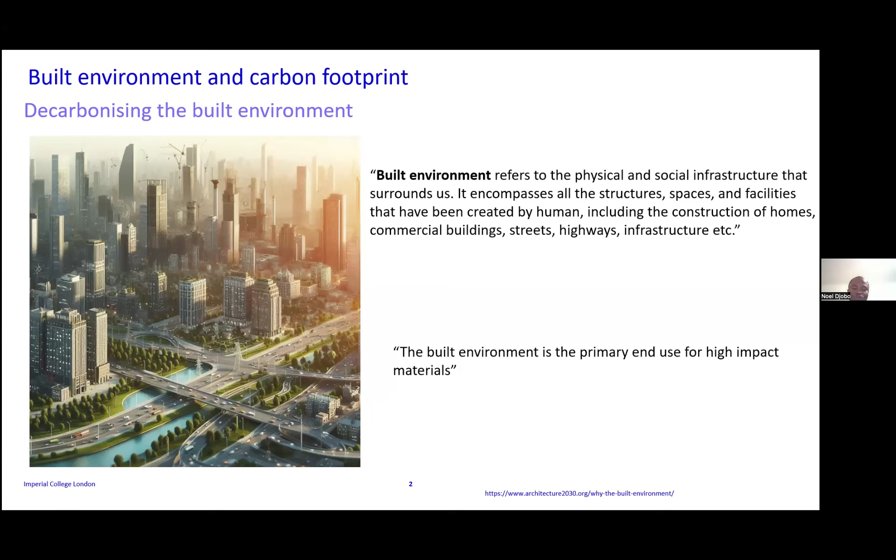But to be able to achieve this, the built environment is known as one of the primary end uses of high-impact material. So it consumes a lot of material. And the challenge with all this consumption of raw material is the carbon footprint of the built environment. It nowadays corresponds to about 42% of the annual global CO2 in the world. And this CO2 emission of the built environment can be split into two types: the operational carbon emission and the embodied carbon emission.

What we mean by operational carbon is anything related to functioning the building: the electricity that you need in your building, the energy needed for heating the building, and also the energy needed for cooling the building, specifically in Africa where the temperature is a bit high. So all these account for the operational carbon.

And the second type of emission is the embodied carbon, which is one of our main interests for this talk. The embodied carbon encompasses everything related to manufacturing the building material. This means extraction of the raw resources, processing the resources, and their transformation into the different types of construction material. We are all aware of the changes in the climate because of human activities.

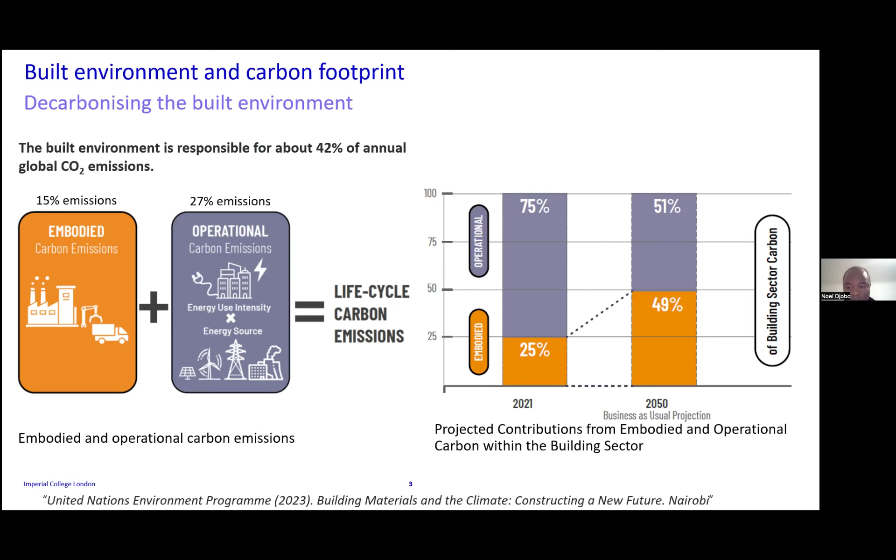Africa, the built environment in Africa has many challenges. Africa is the continent with the fastest urban population growth in the world. And by 2050, this will represent almost 3.17%. And this means that the population in Africa will triple by 2050. So we expect the population to increase by almost 1.3 billion people.

And the 10 fastest growing cities in the world by 2035 are expected to be in Africa. Because of that also, we need a lot of infrastructure to accommodate all those populations. And the point is that so far,

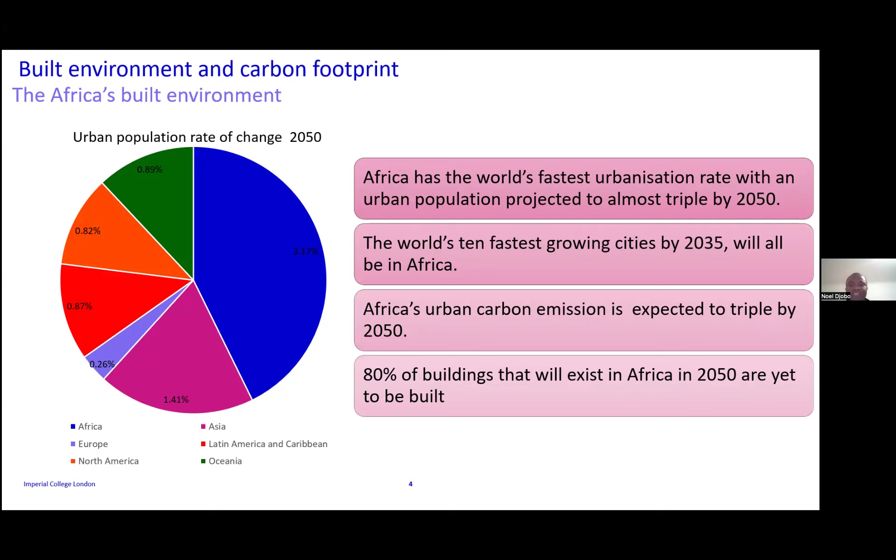the amount of building needed for Africa to accommodate that rapid growth of the population, the rapid urbanization by 2050, we have 80% of the buildings that Africa will need by 2050 yet to be built. So this means Africa will consume a lot of resources to be able to build infrastructure, houses, and everything for its population by 2050.

The point is that the population of Africa, as we can see in this graph, is almost scattered all over the different regions of the continent. And the resources that we need to build all the infrastructure by 2060 will mainly increase the amount of carbon emission that Africa is producing. But the point is that actually only 2% of the globally produced cement in the world is produced in sub-Saharan Africa. So Africa is as big as Europe and North America put together.

And in those countries, 80% of the population are already living in towns and cities. But in Africa, many people are still living in rural areas. But because of the development of the different African countries, we expect that population to rise very quickly, and we need to find a solution to accommodate them, as I was saying previously.

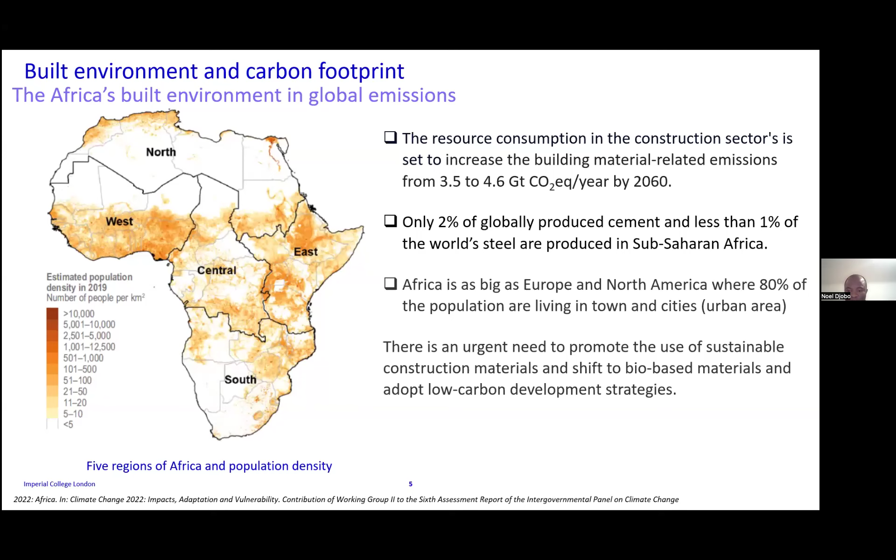What happened is, in Africa, the consumption of raw material and all the environmental issues related to the production of the raw material drew the attention of the scientists that we need to find solutions to be able to develop our continent without impacting our environment. And the three principles for enacting the decarbonization of the building material rely on these three words: avoid, shift, improve.

We mean by avoid, while we are developing our continent, we need to avoid extracting new resources. We need to rely on waste material, try to reuse them and deal with a circular economy system. But where the waste that can be turned into sustainable building material cannot be found, like in many African countries,

another principle relies on shift, which means if we are not able to use waste, if you are not able to deal with the circular economy, another alternative is to shift the type of raw material that you are using. We can rely on bio-based building materials like earth building material, timber, and bamboo.

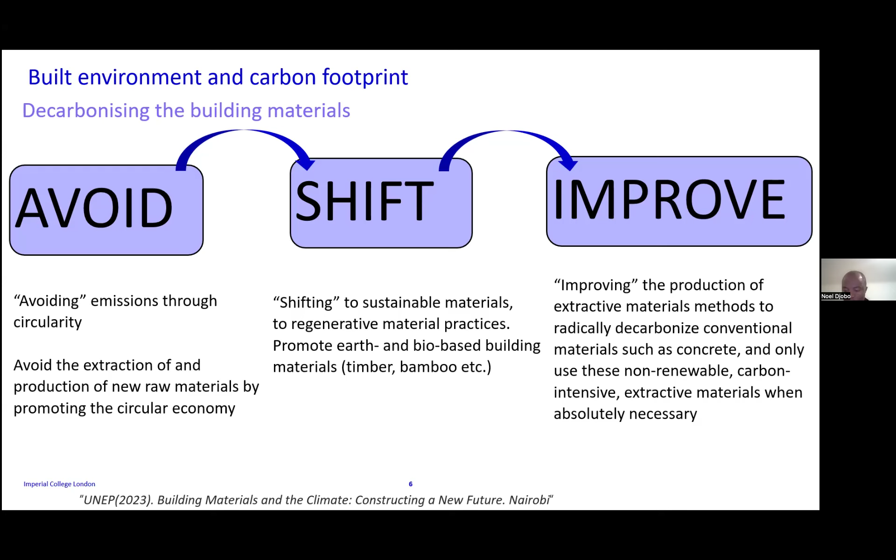And the improve principle means, since cement is a material that is used worldwide and it's a very useful material for building infrastructure, because of the embodied carbon of the material, we need to find a solution to overcome it. Let's delve into cement production and why we believe that it is a carbon-intensive material. Here is the process of how cement is produced.

Initially, for making cement, you need limestone and clay. And the limestone deposit and the clay deposit need to be very close so that the production can be efficient and beneficial for the company. When limestone and clay are extracted, they are crushed and milled to get fine powder. And that fine powder can now be calcined using a rotary kiln.

And here is where most of the issues related to the carbon emission of cement happen, because when you calcine clay and limestone, limestone contains carbon, CO2. So this will release a lot of CO2 into the atmosphere. And the point is that the energy used for calcining limestone is also problematic, because in general, people use fossil fuel energy.

And this clinker, when you calcine here, the product that you have is called clinker. Now you just mix clinker with gypsum, you have your cement. Here is the Portland cement bag that we can find in the market everywhere. And that product now needs to be transported to different places. This whole process

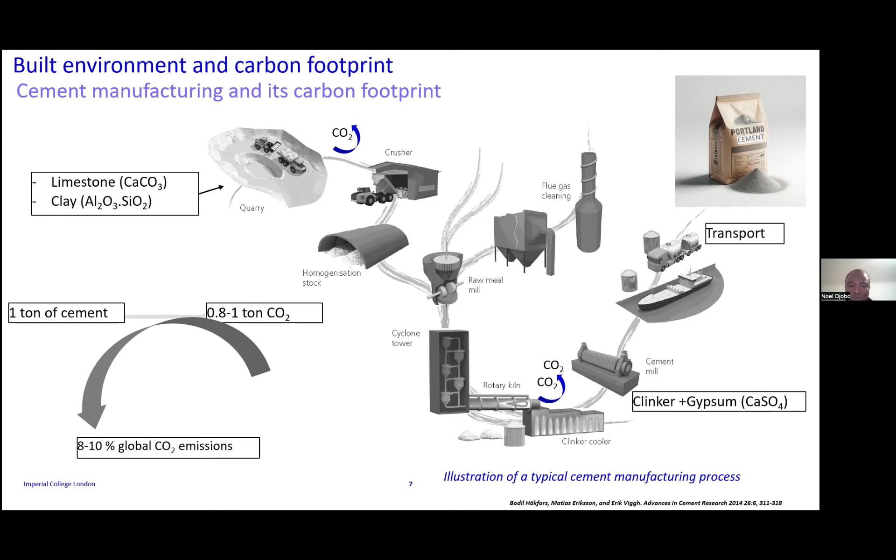So knowing the different impacts on climate change and the environment, the strategy adopted now to decarbonize cement worldwide, I mean, this is a strategy that is accepted by the whole community, by the whole cement industry, relies on 3 methods.

The first method is carbon capture and utilization, which means we come to the cement plant, we set up a device or a kind of machinery that captures the CO2 that is being released during the calcination, and that CO2 can now be stored in the ground like a geological storage or used for something else. A lot of technologies are being developed in that sense. But we all know that there is an issue with the cost and the price of implementing that technology, although they seem to be efficient for capturing.

The second principle relies on designing low carbon cement production technology, which means using alternative fuel for the calcination process, and also trying to harvest the heat released during the whole cement production process and to reinject that heat into the process. This also requires a lot of technology and a lot of money to be implemented, although they seem to be efficient at some point.

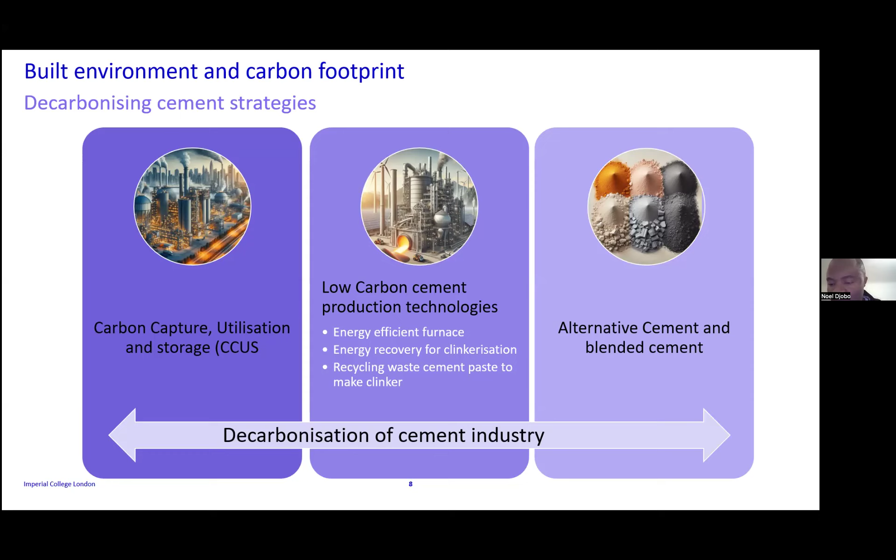Among the two types of alternative cement that I will be talking to you about this evening, we have first of all blended cement. This one is already being commercialized in the world and mainly in Africa. To make blended cement, you just take the Portland cement produced as I showed previously, and you mix it with what we call supplementary cementitious material, SCM. When you mix those two powders, you have your blended cement.

The supplementary cementitious materials being used include fly ash, slag, calcined clay, and volcanic ash. In Europe, Asia or America, they mainly use fly ash and slag. In Africa, you will see companies mainly use calcined clay and volcanic ash.

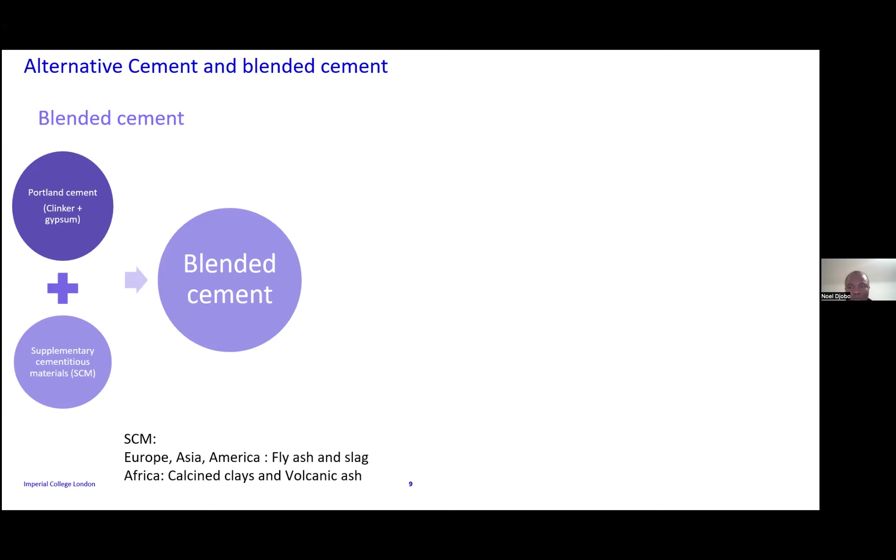This material can also be used to develop a new type of alternative cement that is called geopolymer. Here, the principle is quite simple. You can use the same supplementary cementitious material already being used for making blended cement to develop the geopolymer cement. And the second ingredient that you need is only an alkaline activator, which is in general sodium silicate. There are many of them, but this is the most used one and the most accessible one.

I just have to mention that this sodium silicate is a commercial product that is actually used in the cosmetic industry to make soap, detergent, and many other chemicals. So it is already well commercialized, and within the African continent, this is a product that's well known by many industries, and it's being produced on the continent. So to make geopolymer cement, it's so simple.

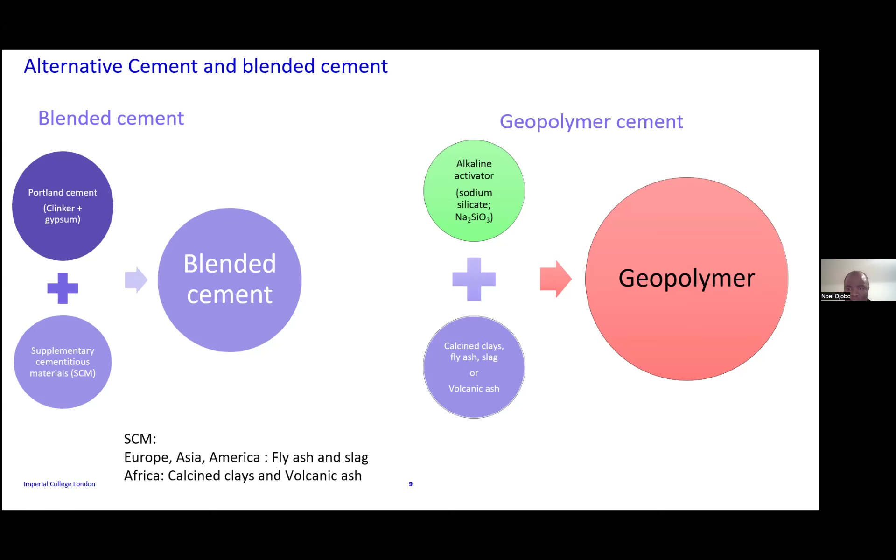You have your alkaline solution, and you mix it with a raw material, which can be calcined clay, fly ash, or volcanic ash, to make your cement. So now, what do I mean by fly ash? Fly ash is a hazardous byproduct generated by burning pulverized coal in power plants. So in some countries where they produce electricity based on coal, they have this kind of waste material being generated. And in Africa, very few countries are producing this type of ash.

And the second thing is that although this material is being produced in large amounts around the world, the point is that the transition happening in the energy sector means that many countries are now going toward solar energy, wind turbine energy or geothermal energy. So this type of product is being less produced.

The second SCM is GGBFS, which is ground granulated blast furnace slag. This material is produced while you are making iron and steel. So during the process of making iron and steel, you have this waste material. But the point is that, as with fly ash, this material is not very popular on the continent, because very few countries, maybe Egypt and South Africa, are producing this type of waste material.

But also in the steel production process, all the effort being put there to transition from high carbon emission steel to low carbon emission steel will lead to the scarcity of this material. So we need to find an alternative.

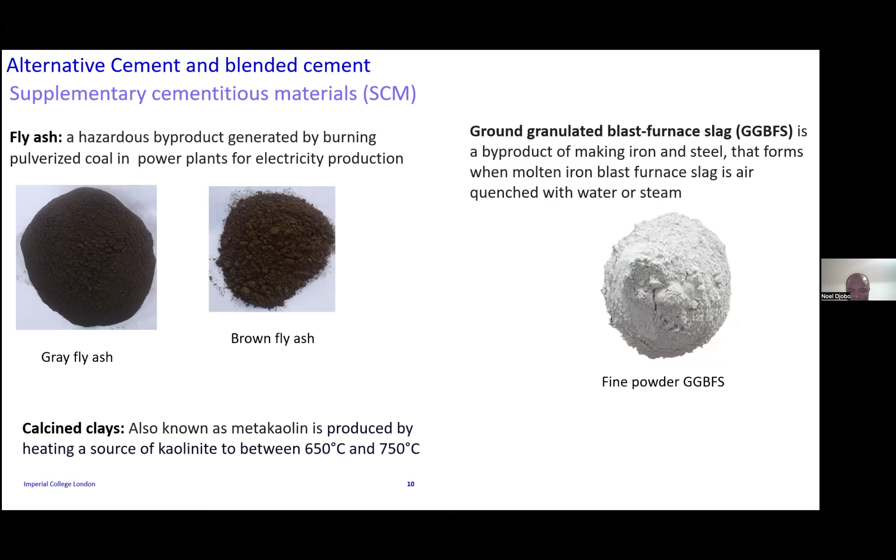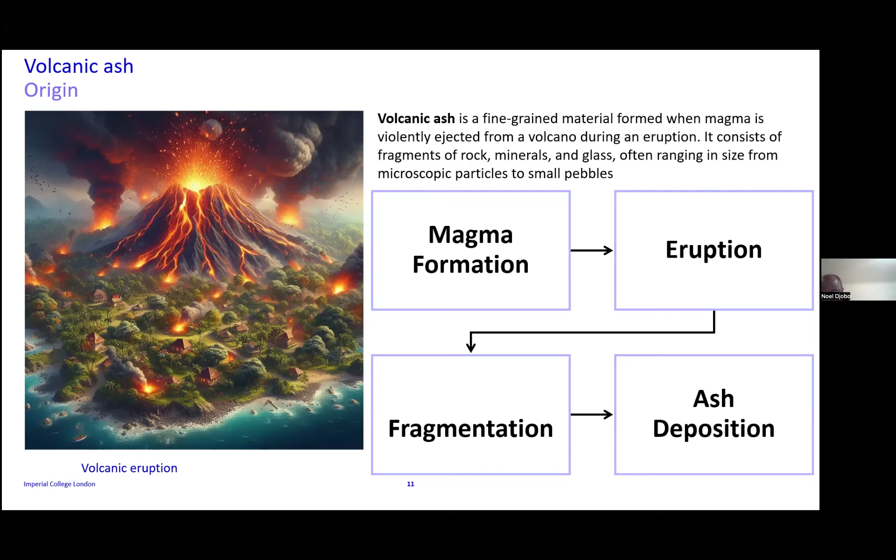And that ash is generally deposited in the villages around, as you can see here. It means after a volcanic eruption, the villages and the agricultural land around it are generally buried by ashes, which of course causes an environmental issue. And the second point is that those ashes can travel a very long distance. It is estimated that after a volcanic eruption, we can find the ashes over 600 kilometers from the volcano.

Here is the world distribution of the different volcanoes. As we can see, in Africa we do have a lot of volcanoes spread out in the different regions of the continent. And as I was saying previously, even in countries in Africa which do not have volcanoes, it is also possible to find volcanic ashes there because the ashes after eruption travel great distances and in different directions. So it is quite an interesting material, widely available, specifically on the African continent.

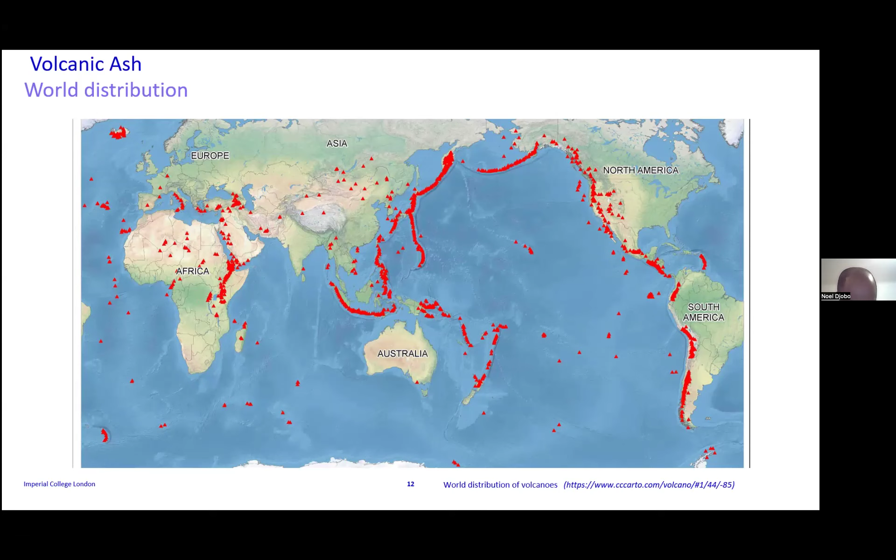Volcanic ash looks like this. Depending on the composition of the material, we have two types of volcanic ash. We have volcanic scoria and we have volcanic pumice. The scoria looks like this: a very highly vesicular material with very large pores, whereas pumice looks like this, with very tiny pores and a low vesicular material.

You can find those materials in different colors. Even volcanic scoria can be found in brown or red color. Even pumice can be found in black and different colors. As for their chemical composition, they contain mainly silica, aluminum and iron.

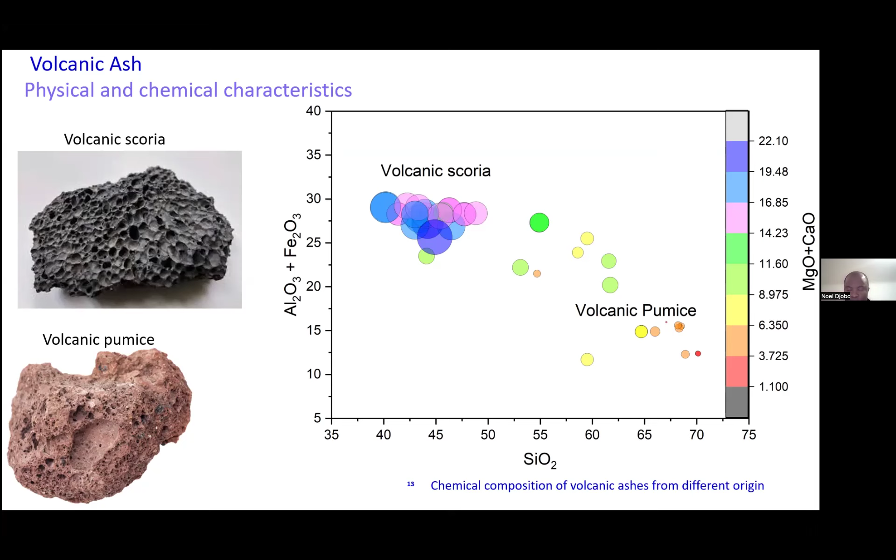Volcanic scoria is distinguished from volcanic pumice because of the amount of magnesium oxide and calcium oxide. This composition is mainly what I characterize, because in Cameroon we analyze a very large amount of volcanic ash deposits in the whole country, and we have found that most volcanic ash in Cameroon belongs to the volcanic scoria category, whereas volcanic pumice is mainly found in European countries like Italy or in South America. Because of this chemical composition, volcanic scoria can also be used for making blended cement.

That's why in many European countries, even where volcanic ash is available, it is not used as SCM. But in Africa, we do use it as SCM, though we generally add a very low percentage.

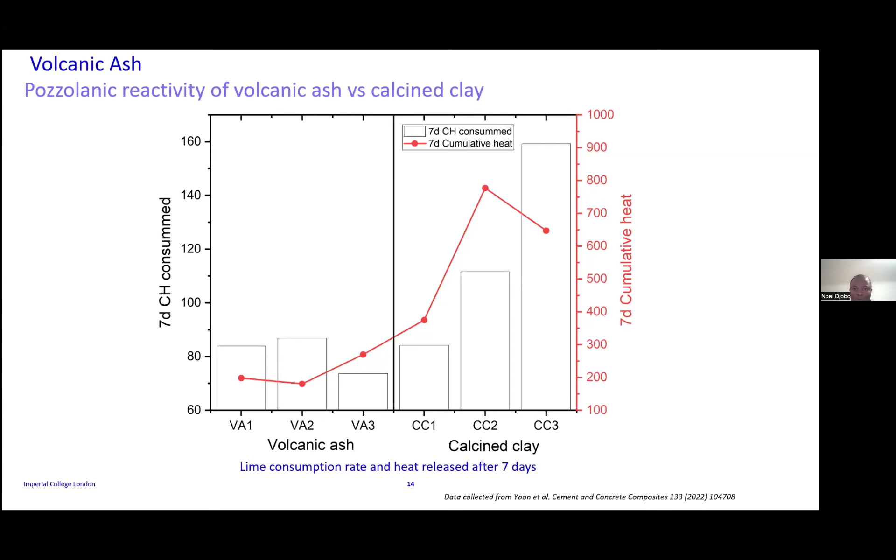Because of that low reactivity, one of my projects has focused on how we can improve the reactivity of volcanic ash.

The two methods that can be applied are calcination of the volcanic ash and mechanochemical activation. Calcination means taking your volcanic ash and putting it in a furnace, heating it up to 700 or 800 degrees. This is what happens with clay—in its natural state, clay is not reactive, but to make it reactive you need to calcine it. In the previous slide, I compared volcanic ash used in its natural state with clay that had been calcined, and we saw that the calcined clay was much more reactive than the natural volcanic ash.

Some work has included calcination of volcanic ash, but the point is that calcination was not quite efficient. During calcination, volcanic ash can also contain some clay mineral, and during the process the clay mineral decomposes—that's what increases the reactivity. But since in many volcanic ashes the clay mineral content is very low, less than 2-3%, calcination is not efficient.

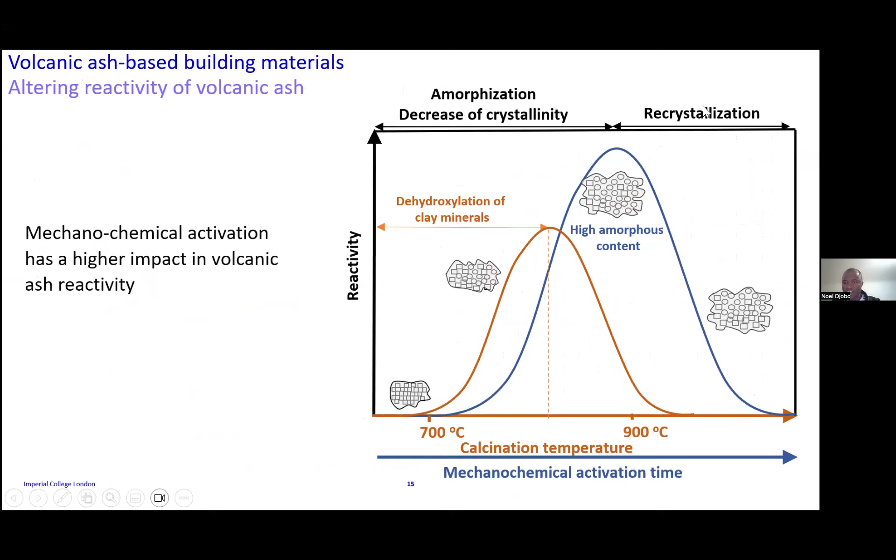We can also see here how by milling volcanic ash at different times, we are able to minimize the amount of fine particles. When you minimize the amount of particles, first you increase the reactivity of the material. Second, you are also able to change the mineral crystal structure of your materials. You are trying to destroy your material to make it amorphous, not have a perfect pattern. It has to be completely amorphous.

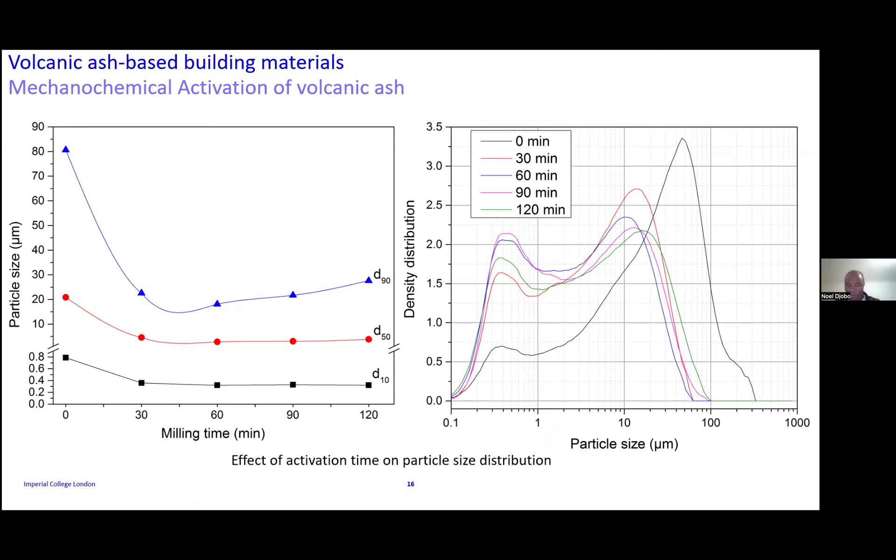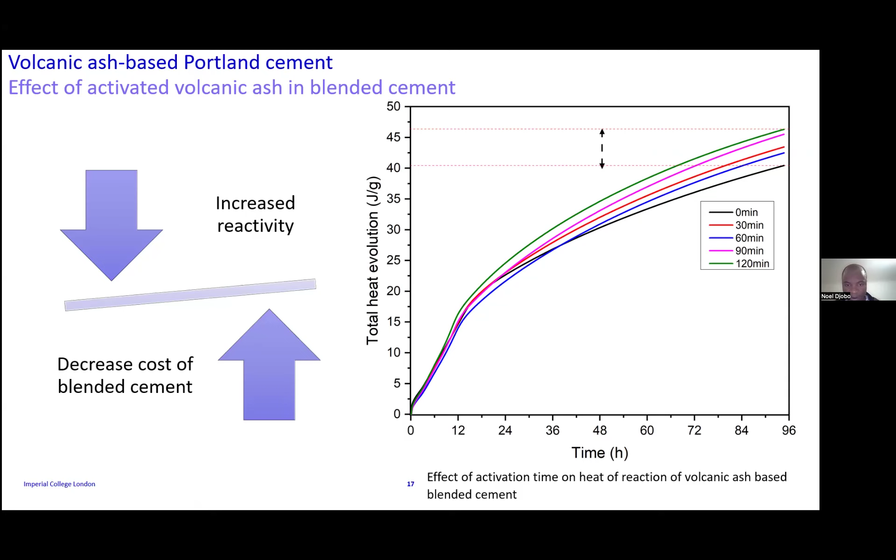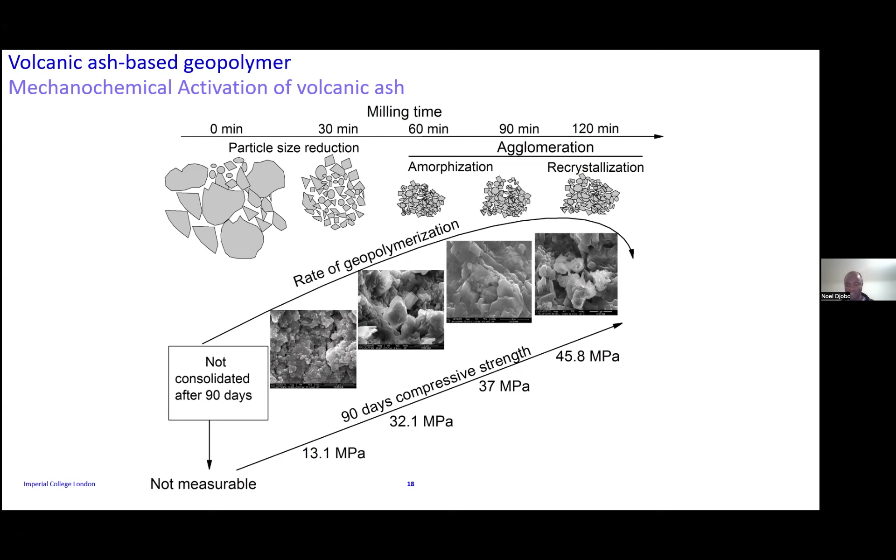It means the product being developed here can even be used to construct bridges. For a bridge, you need materials that are very strong, so that is quite fantastic. A material that was not able to give any strength initially, by applying this process, we have a material that when mixed with our alkaline solution can achieve much higher mechanical properties. That was very fantastic. I will continue by showing some of the products I developed.

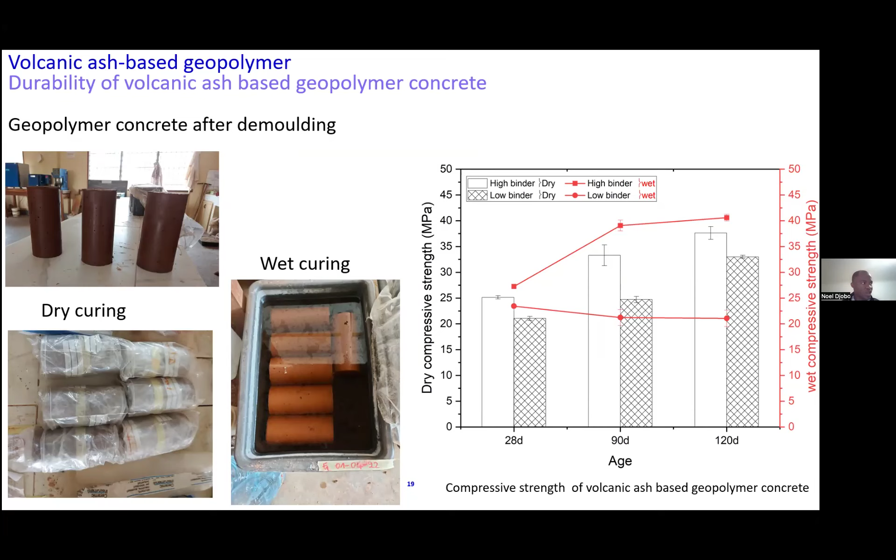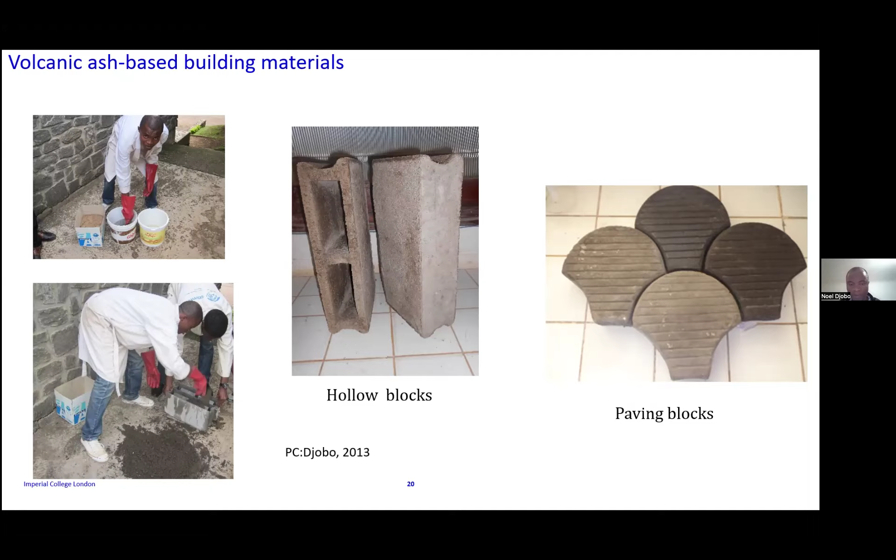So the title of this presentation was Sustaining Africa Building: the Power of Volcanic Ash. From all the data that I've shown, the power of the volcanic ash relies on these different points.

First, it is a regenerative material. When you use volcanic ash as a raw material for building, even after the end of the life of the material, the volcanic ash that has been used can still be reused to make the product, can still be used as a raw material. It is easy for exploitation.

On the contrary to clay and other materials, volcanic ash is generally found in open mine quarries. So when you extract volcanic ash, you don't need to dig the earth—it's like a mountain where you just collect your sample. And the benefit of this is that when you collect the sample, you are trying to recover the surface that has been occupied by the ashes after the volcanic eruption. This means the land or villages that were buried or occupied by the ashes after the eruption can still be used after exploiting the quarry, which is quite fantastic.

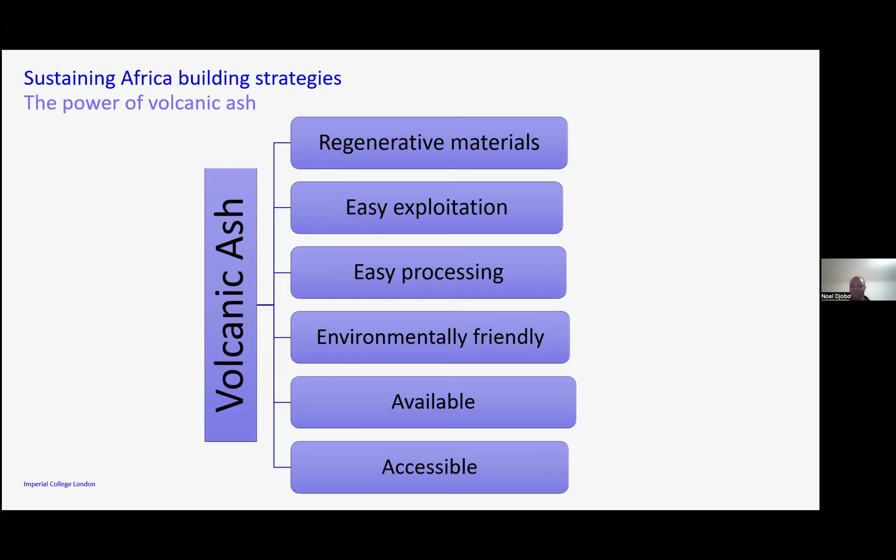So the energy required for milling the material is very low compared to the other raw material. Environmentally friendly, as I said, it's an open mine quarry. So exploiting volcanic ash doesn't have a big impact on the environment, because when you exploit volcanic ash, you are just trying to restore the land that has been occupied by the ashes initially. As I showed previously in the map, it is a material which is widely available and accessible. So these points form the power of volcanic ash, because very few materials can have all those benefits.

I will end my presentation with this slide and recommendation. For Africa, what we need is a material that encompasses all those key points. The first one, climate negative. So the building material that we need in Africa should be climate negative. It means the material should not have any harmful or negative impact on the environment. That is common for every part of the world.

But the second point, which is cost effective. We know Africa is developing. We cannot develop our built environment. We cannot build our infrastructure if we still have a very expensive material. So we need to have a material that is cost effective. That is why a material like volcanic ash, which is widely available, accessible, easy to get, is very welcome.

And the product that you are developing should provide a certain comfort. In Africa, we are suffering from excessive heat, mainly in sub-Saharan Africa. So the material that we need to develop should be able to provide a certain thermal comfort to the building. So we need to make sure that the material is quite comfortable for the population.

And the last point is the availability. So the raw material to develop our building material should be available, and the building materials that are being developed have to be available around the continent, because what makes cement expensive actually in the continent is the availability of limestone and clay. Limestone is not quite available in the continent.

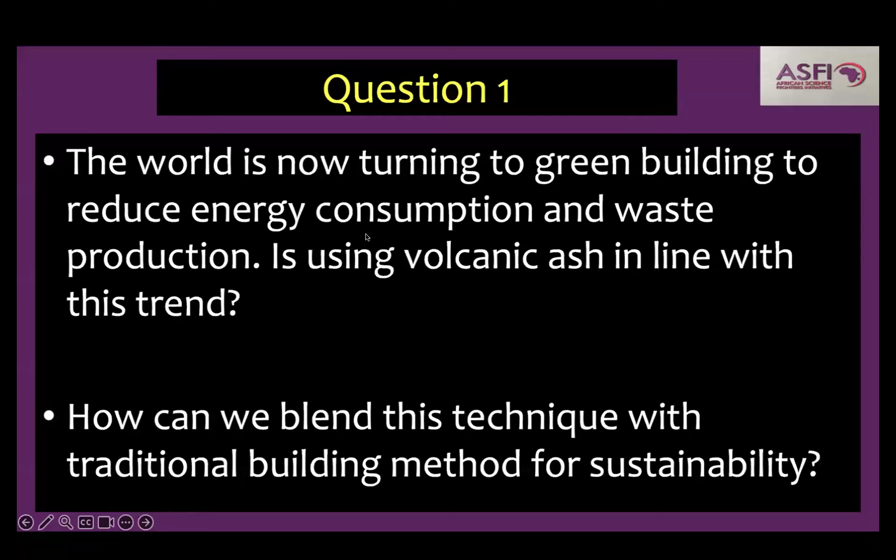Yeah. All right. Thank you very much. The second one, I want to know about the mechanochemical activation of volcanic ash. What about the energy consumption needed to achieve the expected fineness? Yeah, that is a good question.

In the conventional milling process, you have a jar, a big jar, and you have balls inside. You put your sample, and when you rotate, the balls come together and interact with the material in the sample and reach the fineness. But the magic around the mechanochemical activation is the process that you use. So you will use the same energy that you use to grind the clay or any type of material.

But here, in the mechanochemical activation process, when the ball jar in which you are putting your material is turning clockwise, the balls inside will be turning in the reverse sense. So the fact that both are moving in different directions makes the energy within the material very high. So you are still using the same energy as conventional milling, but within your milling media, the energy is quite high because of the mechanism that is happening.

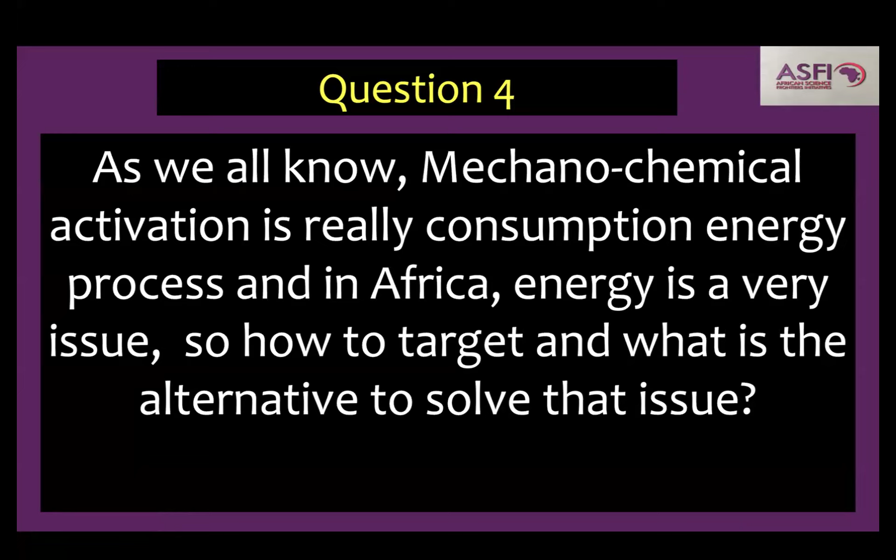All right. That is great. Okay, number 4. As we all know, mechanochemical activation is really energy consuming. Okay, I think you have answered this, isn't it? Yeah, I answered. Yeah, you answered this already.

The last question I got from here: how does the use of volcanic ash in construction materials contribute to the sustainability of buildings in Africa? And what are the potential environmental and economic benefits of this approach compared to traditional materials? I think you have partly answered this, but you can still respond. Yeah, it is a nice and tough question too.

What I will say is like, can you show me the question again, please? Because I missed it.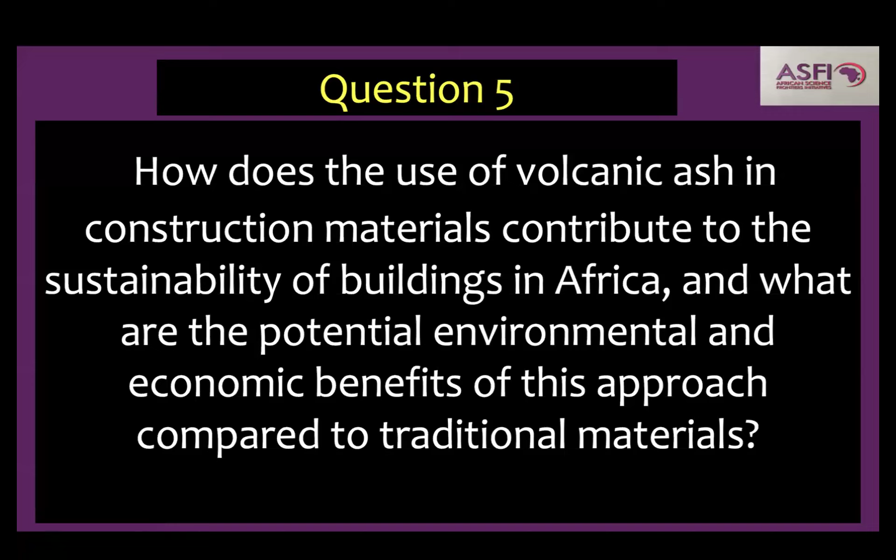Okay. When we deal with sustainability in the built environment, it relies on, I will say, three principles. First, we need a material that is climate negative, so it doesn't have a bigger impact on the environment. Secondly, we need a material that is available, not only for now, but that will also be available for the 100 years coming. And the third principle is the cost of the material. So the material needs to be cheaper.

So I think in my presentation, I have tried to demonstrate that those three principles are met by volcanic ash, because they are available compared to most of the raw materials being used, like limestone or clay for making cement. The exploitation of volcanic ash is more environmentally friendly than those materials because you do not need to change anything in the ecology. You do not need to change anything in the environment. The only thing you need to do is collect the material. And when you collect the material, you contribute to restoring the land that has been occupied by the ashes after the volcanic eruption. That's what makes it an environmentally friendly material.

And the energy required for milling volcanic ash is also very low, because the harder the material is, the higher the energy you need to mill it to get a certain fineness. But with volcanic ash, in some places, you will even find it already in powder form. So in that sense, it's a good material. I hope I answered this question.